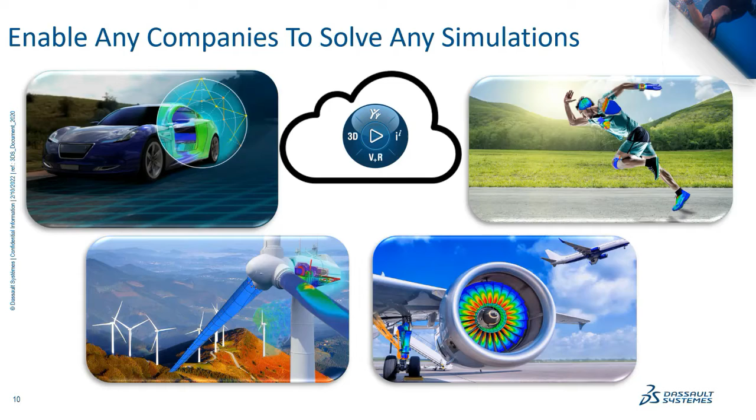Now market trends for simulation have never been stronger than before. It has been proven by the broad design, engineering and manufacturing industries that simulation helps launching new products to market faster. The benefits have been proven and are multiple: faster product development, less prototyping, more innovation, faster and informed decisions on design.

So before companies adopted simulation, there was a very lengthy process for any company to launch a new product into the market. They had to undergo various hand calculations to make sure the product is safe under the criteria, then create a prototype, do physical testing, and then launch the product. But due to simulation, the time to launch new products in any industry has been reduced.

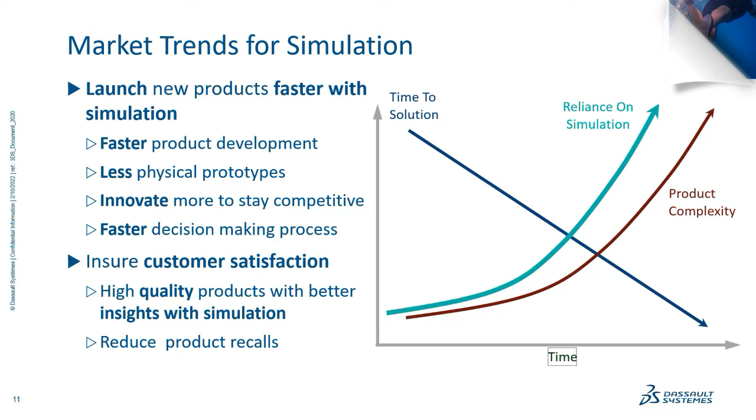Another key factor is customer satisfaction in providing not only innovative but high quality products. Market competition has become tremendous over the last 3 to 4 years, with everyone manufacturing more competitive products. So to survive in the market, we need to manufacture products that are more consumer friendly but also less costly.

The bottom line is that simulation helps you to be more competitive in your market. Now we all know SolidWorks simulation, right? It is able to perform analysis, and with the help of Simulia, we are able to perform more complex physics as compared to SolidWorks simulation. So what Dassault Systemes has done is create a cloud-based platform called SimuliaWorks for simulation.

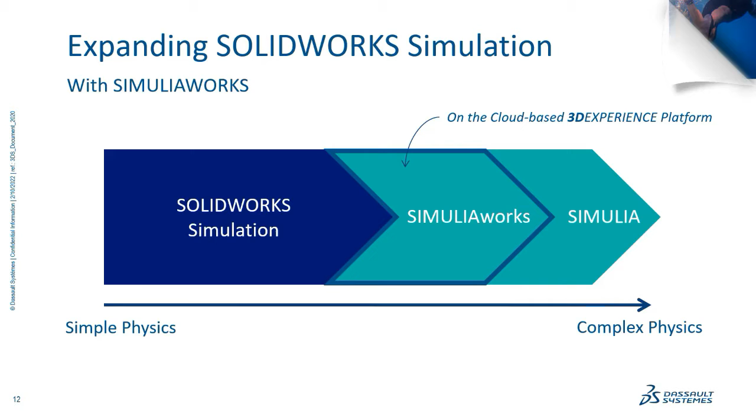So without wasting much more time, let us jump on to the Simulia, and look at why, when and how we should switch from SolidWorks simulation to SimuliaWorks.

Problems with very large deformation or strain - whenever you are considering a problem with large deformation, at that time we can jump to SimuliaWorks. Or whenever we have an assembly with advanced contact conditions, with a large number of contacts in an assembly, we are also able to get much more meshing capabilities in Simulia as compared to SolidWorks simulation.

Also, fast solve time for advanced analysis. Since this is a cloud-based FEA software, we are able to leverage the cloud capabilities to solve the problem - I will touch on that in the later part of the analysis. With a few more additional capabilities, you are able to use more computation power over the cloud to run your analysis.

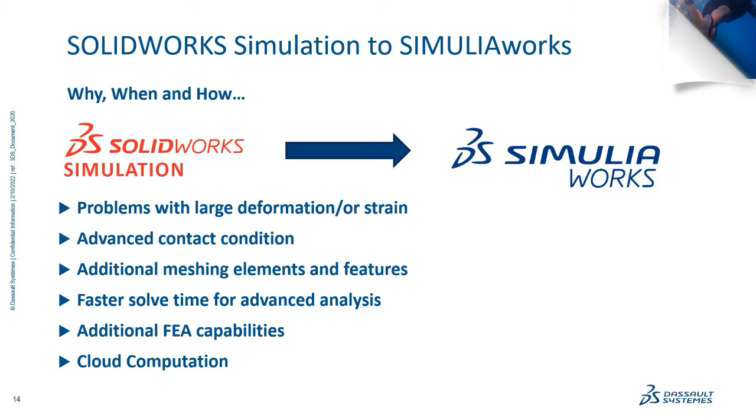So this is a simple model what I have created in SolidWorks, and this is a simple animation of it. So I need to be sure that the crank what has been designed is fit for its use.

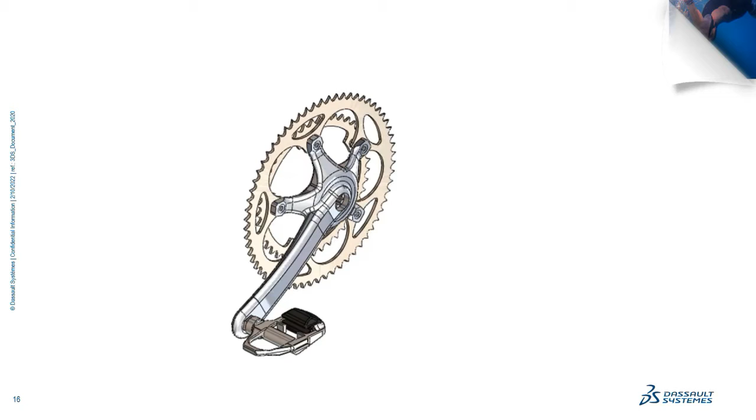So first things first, we usually simplify our model. We remove the unnecessary parts like the sprockets, etc.

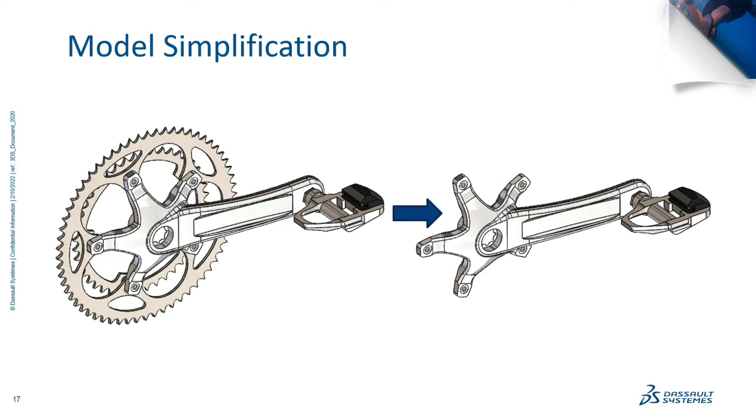And then we log in to the platform. Now the platform is always connected to the cloud, so each and every user will get his own user ID and password, his own credentials, so that he can log in to the platform and make use of various apps. Either he can be a designer, an analyst, or a marketing or sales guy. So according to his need, he can make use of various apps and start his work.

Let me jump on to the platform. I hope my platform screen is visible to you. So I have just logged in to my platform from my usual Chrome browser.

Over here you will get various roles, starting from your 3D creator, which is used for modeling. Then we have different roles for project planning, roles for electromagnetics engineer, roles for CFD fluid dynamics engineer, and so on. So today we will be considering the simulation roles, like my simulation mechanics engineer role. According to your role you can select it, and once selected, you will get the option to pick the proper app in which you want to perform the analysis.

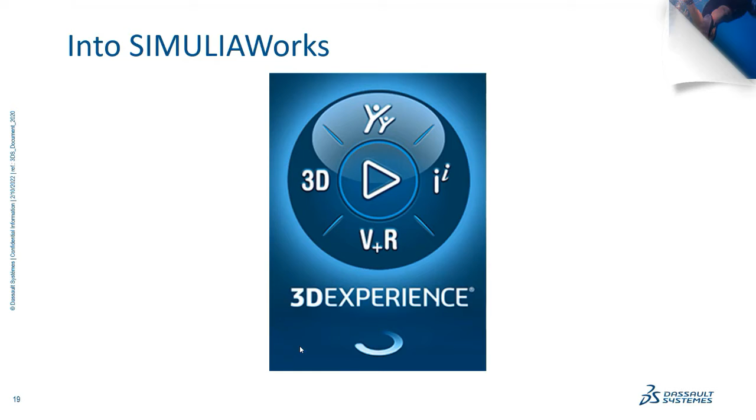And once you have opened your Simulia app, we are into SimuliaWorks. So let us check how we can set up the study and leverage the capabilities of analysis on the cloud.

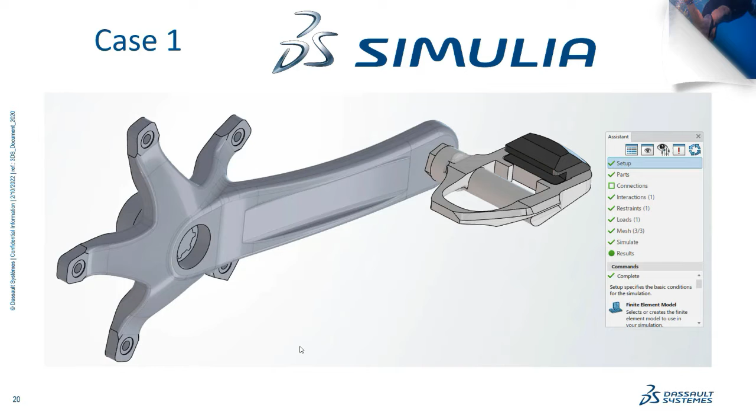Okay, so this is my Simulia window what you are viewing right now, and this is my crank. Over here you will get a good user-friendly assistant at the right side, wherein you can set up, apply material, apply any connections, fixtures, loads, meshing, etc. And on the left side you can see the feature manager, similar to what we have in SolidWorks, showing what kind of meshing is done, what kind of material is applied. So everything can be governed from here.

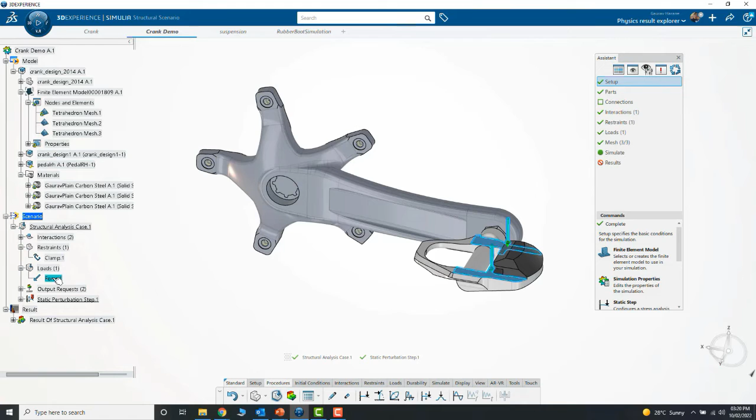And finally, what kind of boundary conditions like clamps are applied at these blue locations - I have applied a force at this location. So you can apply various types of boundary conditions. If you look at the bottom, there are various fixtures available, either clamp, displacement, bolts, etc.

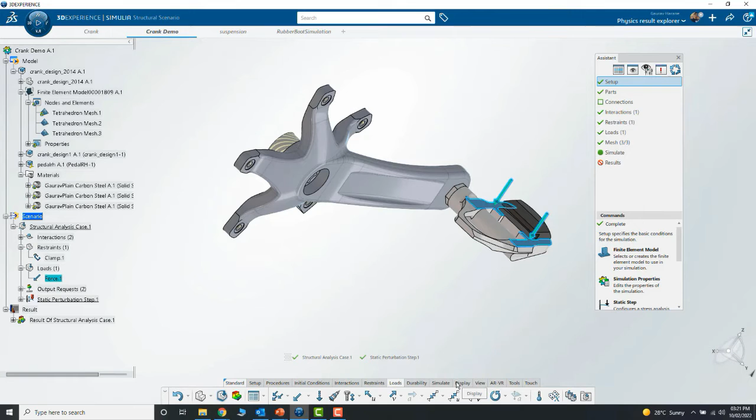And the same way it goes with loads, like if you want to apply pressure, force, gravity, relief, bolt force, translation, torque, velocity, and so on. And once everything is done, you just have to run the analysis.

Okay, let us touch upon the meshing part in this model. Let me jump on to Simulia and unhide the mesh. So you can see over here the meshing is performed. We have various advanced level meshing options available - not only can you use tet mesh, but we have hex mesh, hex dominant mesh, etc.

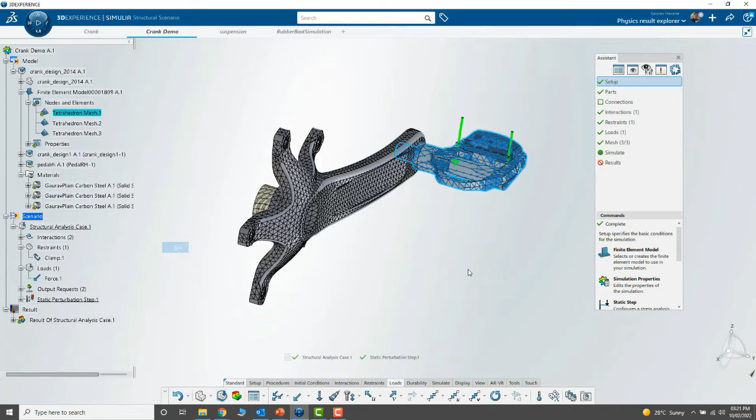So if I touch upon one of the mesh, let me edit it and show you the capabilities. From over here you can select the element order, etc. You can select the size.

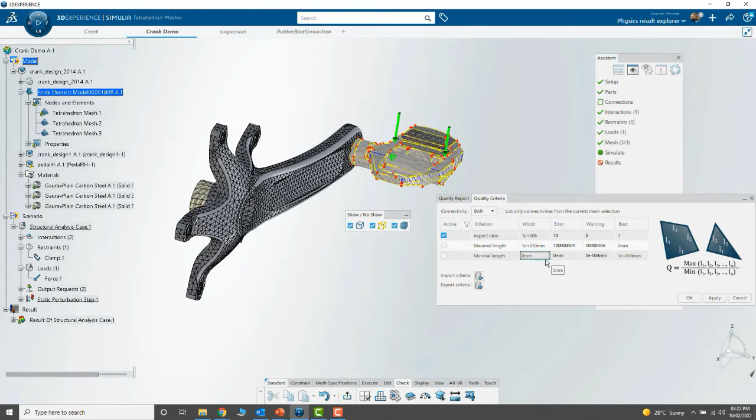In edit options, you can check whether your mesh is satisfying the criteria of aspect ratio, angle of element, and skewness. You can check what elements have failed or are not satisfying the criteria, and edit them to fulfill your criteria. You can even specify your own criteria for minimum and maximum aspect ratio, minimum and maximum skewness, or angle for each and every element.

So meshing is available in Simulia, up to a good extent. You can edit your elements, edit your nodes.

Moving ahead, once your materials, boundary conditions, and meshing are done, we go ahead and simulate it. In simulation we have different categories. If you want to check whether all the loads, boundary conditions and mesh are proper, you can simulate only the checking criteria, so that if there are any errors present, they can be taken care of earlier.

As I mentioned, you can perform the analysis on your local computer. As my laptop has 8 cores, it will show over here. Or else you can run your analysis over the cloud.

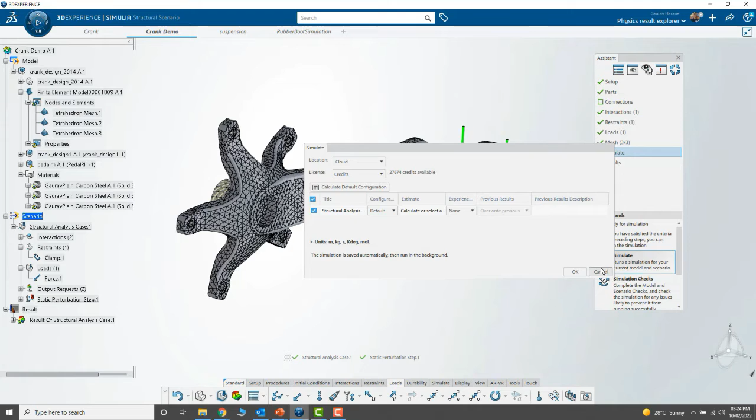Sometimes your problem is too large for your local computer to solve, and it may take 8 hours, 10 hours, days or weeks. At that time, you can leverage the advantages of cloud computing, running up to 144 cores, which can reduce your computation time from days to mere hours and minutes. This is one of the main advantages -- no need to invest much more money in your system resources, you can make use of cloud computation instead.

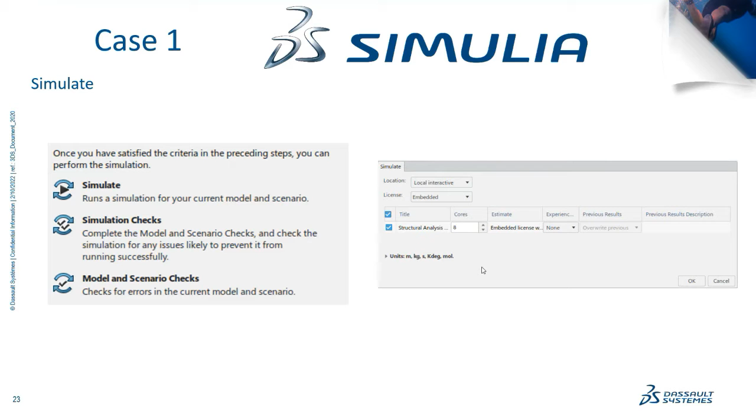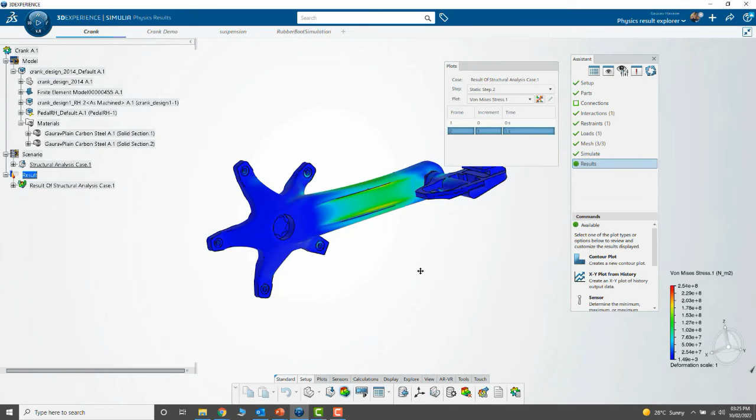So once analysis is done, we can check the results. Let me highlight the results. Over here I have run a non-linear analysis for 1 second, and these are all my post-processing options. This window will help you post-process your result.

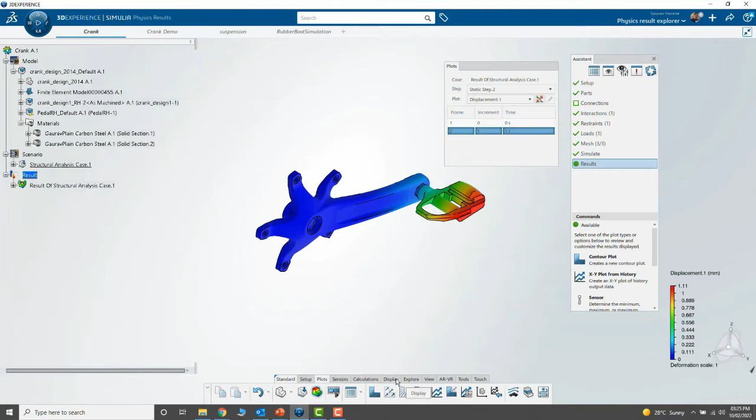This is my stress plot, and you can animate it to check the displacements. Over here it will show you all the values. You can even plot all types of results, starting from factor of safety, contact pressures, etc. You can also take a section of your plot to understand the results. So all these types of post-processing can be done from here.

And finally, you can create a good custom report as well once the analysis has been completed.

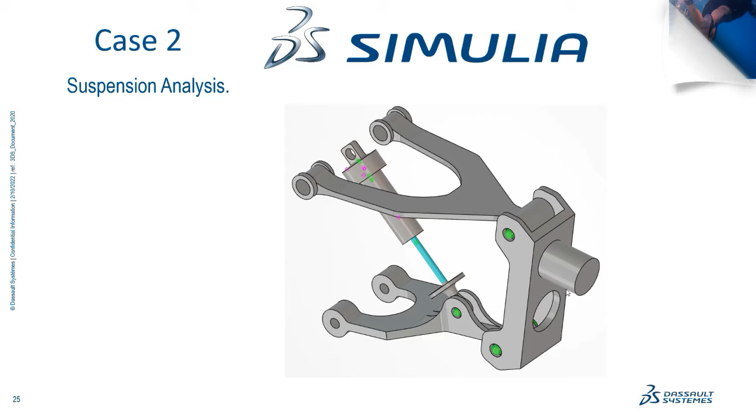Now moving ahead to the second case study. This is an example of a suspension. At this location where you see a circular extrude, my wheel will be mounted. I want to check, whenever the vehicle comes under a rough road or bumps, how these two arms behave, whether they would fail, and whether all the fasteners, nuts, bolts and pins are able to sustain the load or not.

So if your assembly is consisting of various parts, you are able to make use of contact conditions -- we have general contact in Simulia. Let me go on to Simulia and open the suspension assembly.

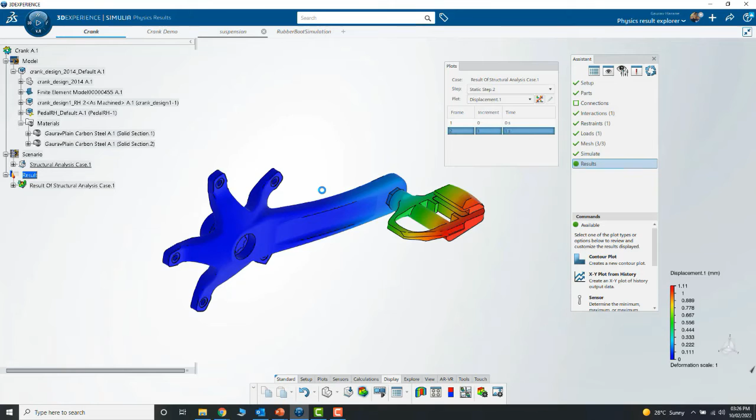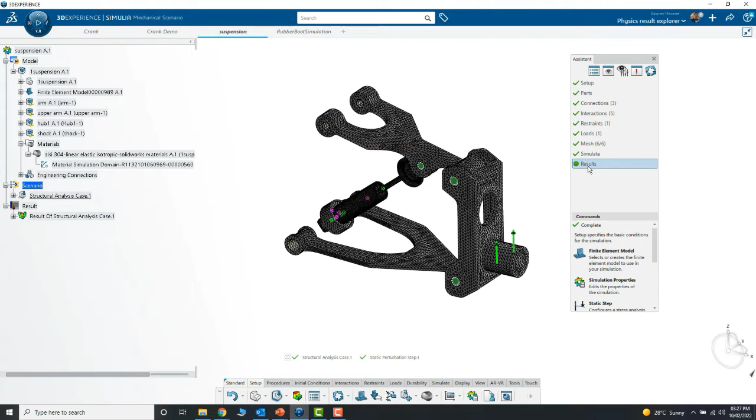And the material is applied. Finally, let me showcase the results. This is a simple static analysis I have done on this suspension. This is my stress plot -- the load from the wheel is transferred to the different parts connected to it. And this is my displacement values.

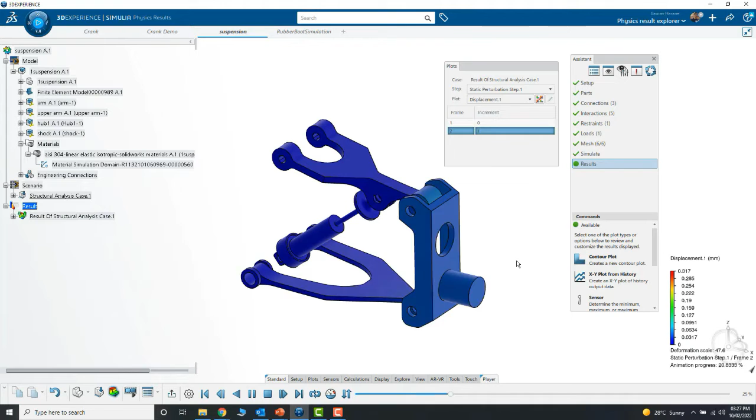Even you can apply pins, bolts and check whether those parts are failing or not. You can apply virtual pins, bolts, etc.

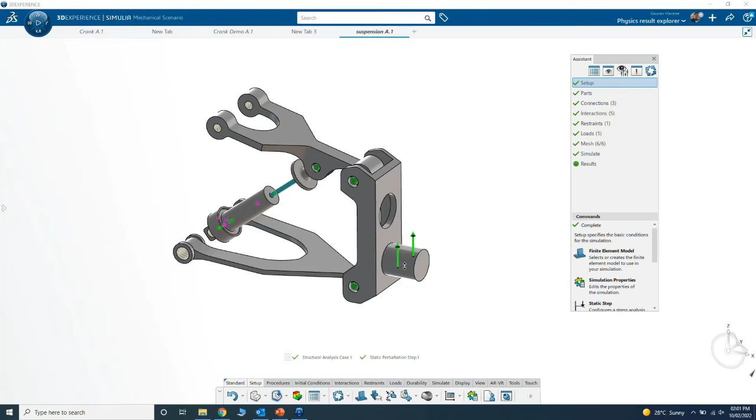Now coming to the next case study, wherein if you want to perform analysis on hyperelastic materials, like this rubber boot simulation. These rubber boots are used in many industries to protect flexible connections between two bodies. They are designed to accommodate the maximum possible swing angles at the joint and to compensate for changes in the shaft length.

Take an example of our gear changing mechanism in a vehicle -- whenever we shift gears from first, second, third or reverse, such rubber mounted boots are used. This is one of the applications.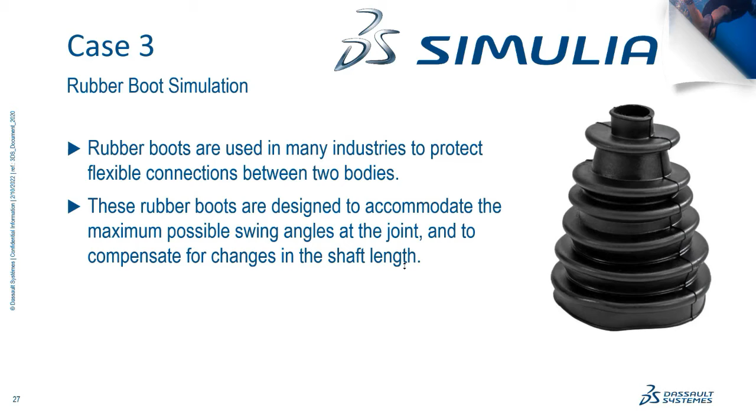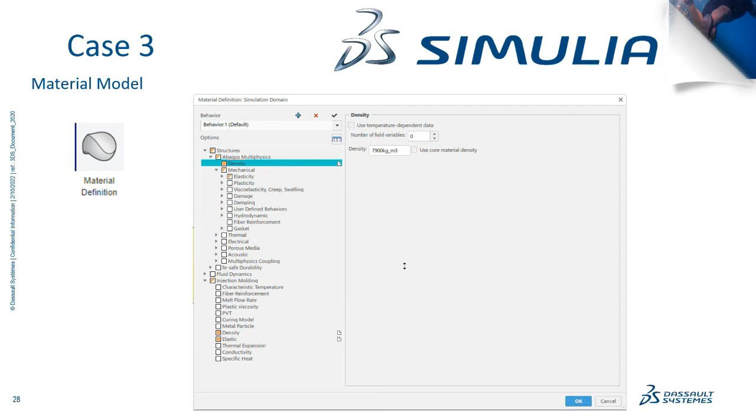In this we will look into material model creation -- what kind of material properties can be created in Simulia. Let's go into this. So from here we have this material definition app. For every application we have different apps. Like if you want to create a material, for example, let me give it a name.

So my material is created and you can provide all the parameters, like what is the density, even different properties in elasticity, whether it's a hyper elastic material, whether it is foam material, plastic material, if you're interested in checking the damage, fiber reinforcement, gasket material, thermal, electrical, etc. Material definition covers pretty much each and every aspect of the materials, so you can create your material by providing the suitable mechanical properties.

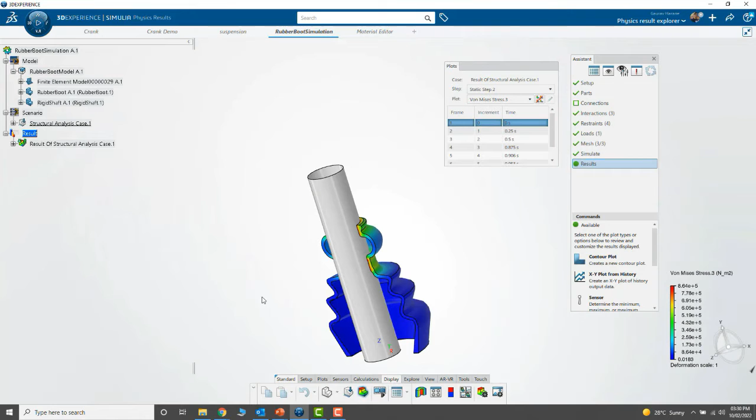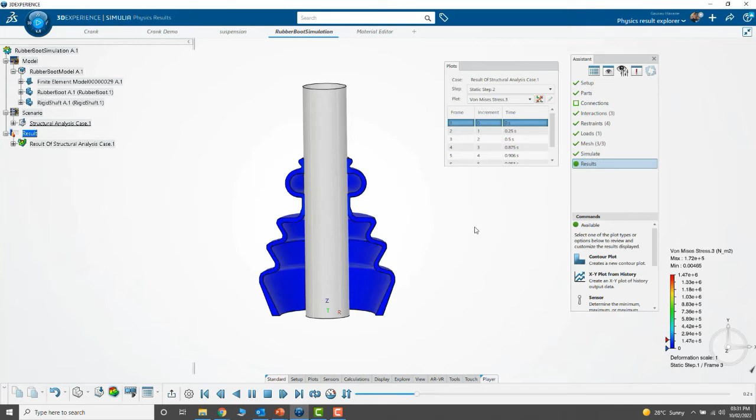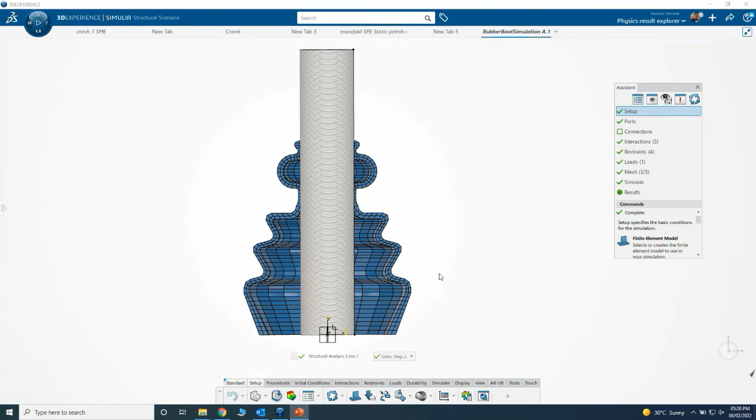Let me come back. I have taken the section and ran this nonlinear analysis. Whenever the angle shifts, the shaft is projected at any angle, for example, it is projected here at 30 degrees. So how does my material behave? You can see how the elasticity of the material performs. Such kind of analysis can also be done by providing good material properties. So this is my stress, this is my displacement values. Then you can even check the contact pressure values and so on. So these are the results.

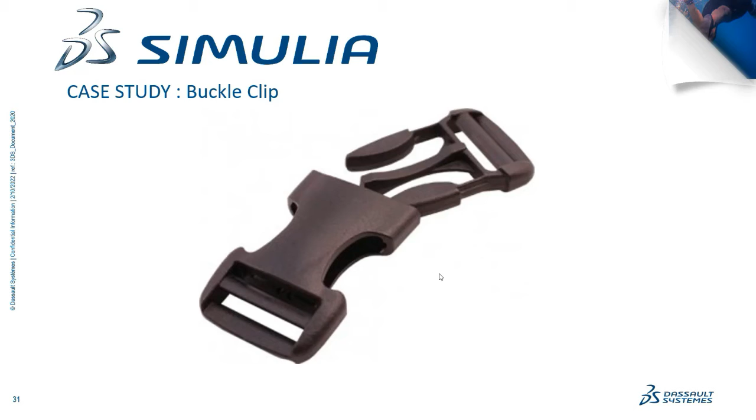Now let me highlight a few more applications. This is an application of a buckle clip where I had done the nonlinear analysis, which makes use of highly contact conditions. In this case you can see there is a contact between the two parts, so that can also be done in Simulia.

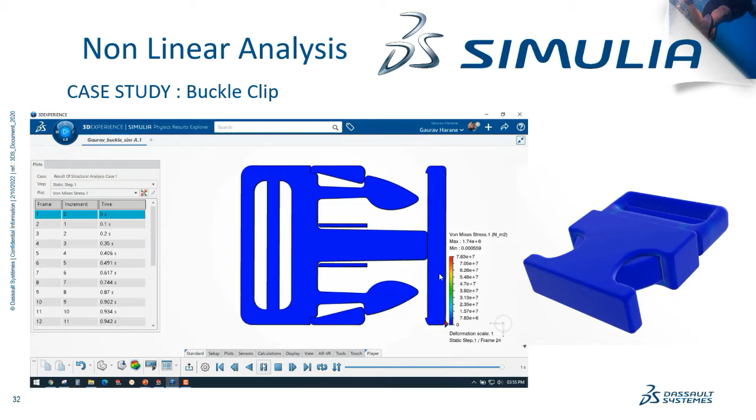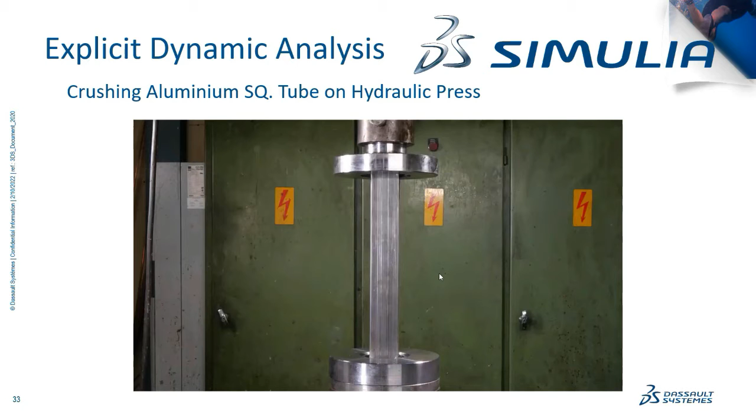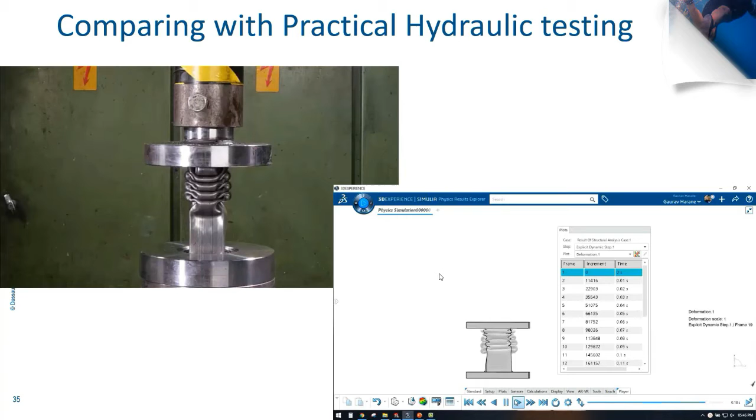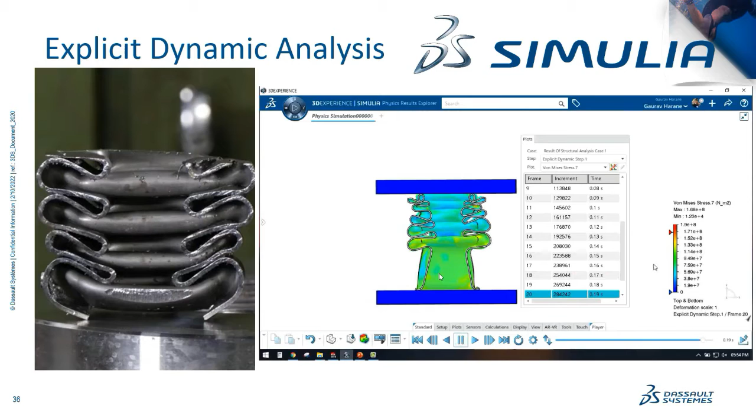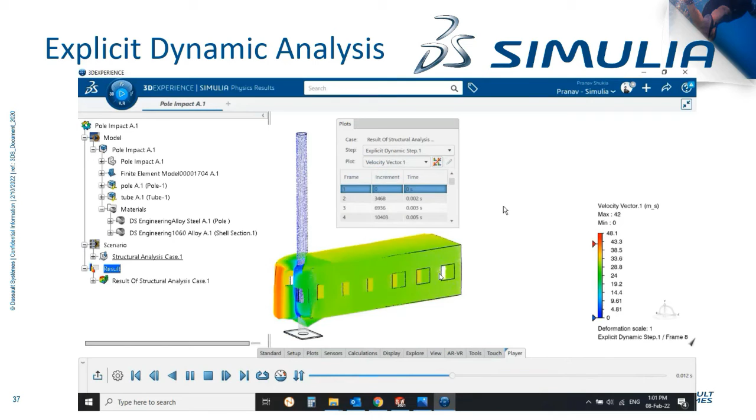Also you can perform crash analysis, impact analysis. Now this is an analysis of a bogie, or the train bogie, against the pole. Such kind of analysis can also be performed, and you can leverage the results like the stress, displacement, materials properties can be applied, and you can check the results. Nowadays we can see the crash analysis has been made mandatory whenever the vehicle is released into the market, so such kind of analysis are done for the same.

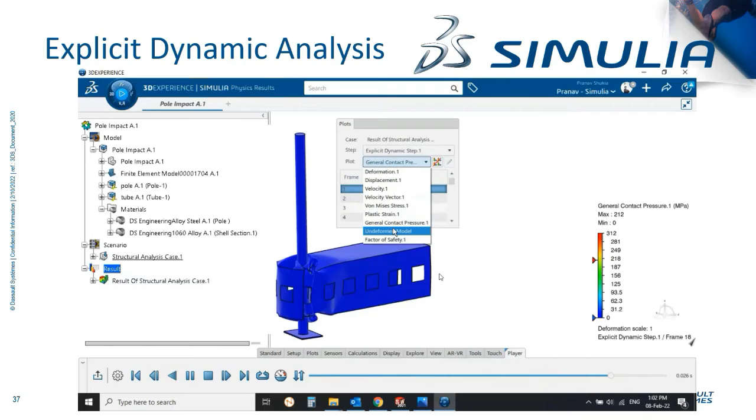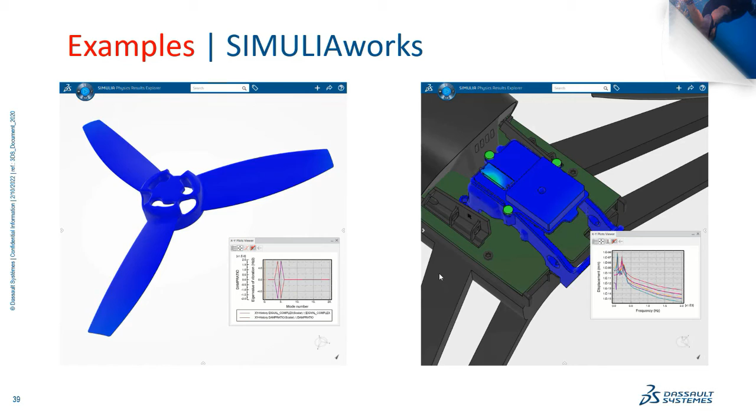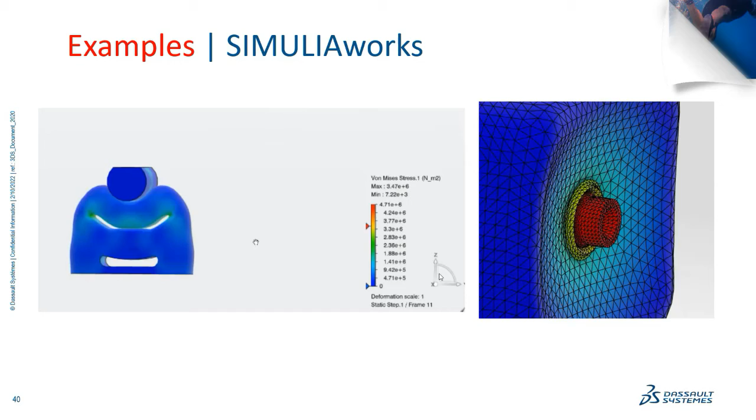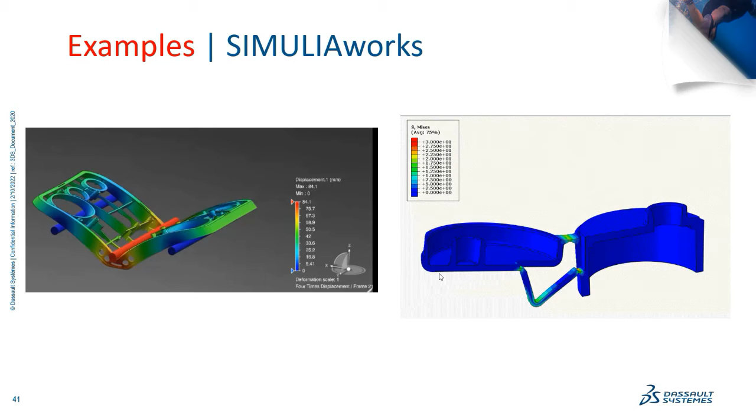And a few more examples like drop test, impact test, can also be performed in Simulia. Now this is an example of vibration analysis. You can even perform frequency analysis to extract the resonance frequencies. This is an example of hyperelastic materials, rubber materials. And this is an example of large displacement problems, like 3-point bending. For any consumer product, either it can be mobile or casing of any product as seen in this example, we perform this 3-point bending test to check the strength.

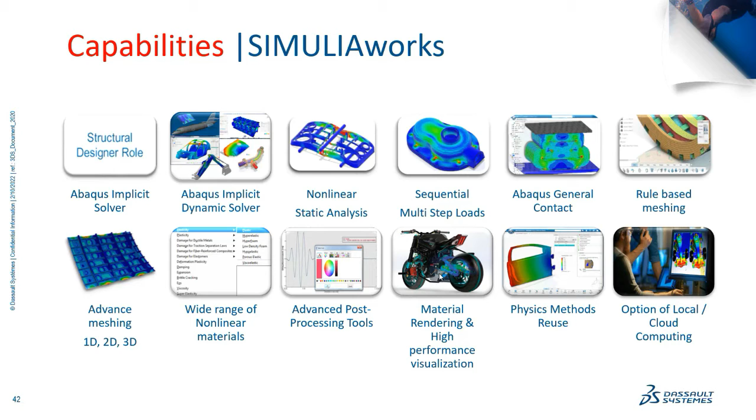Alright, now coming to the later half of my webinar, let us check what are the capabilities. So you are able to get Abaqus implicit solver in Simulia, you can perform dynamic analysis, non-linear analysis. You will also be able to perform advanced meshing, either it can be 1D, 2D, 3D, and you can provide a wide range of non-linear materials, either hyper-elastic, hyperfoam, hypoelastic, porous, etc. With the help of advanced post-processing tool, you are able to understand and visualize your results better. And one of the main advantages is the option of local computing or cloud computing - you can make use of cloud resources and go up to 144 cores to run your analysis.

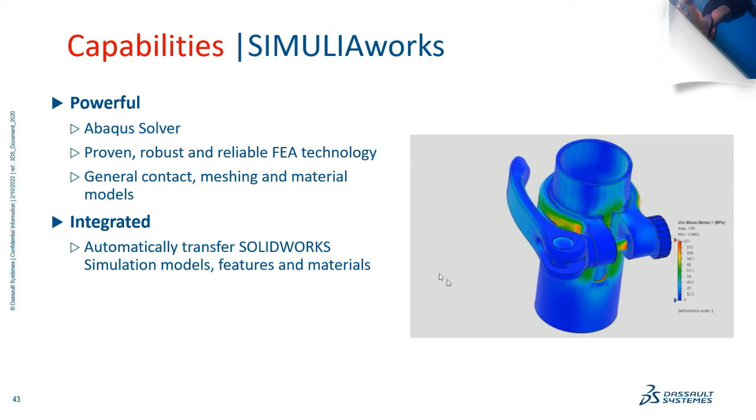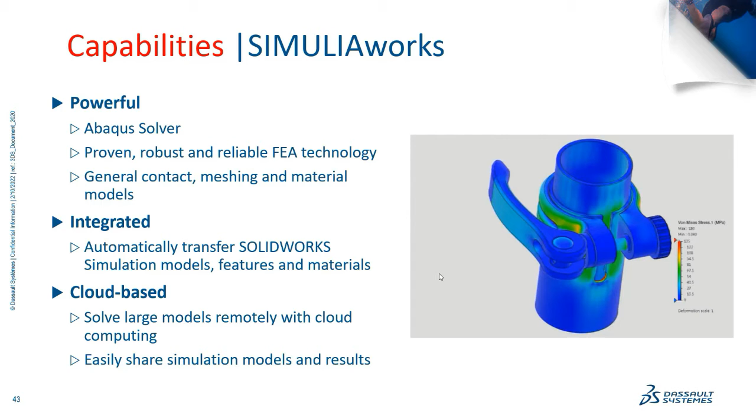Now if I talk about capabilities, it is very powerful, it uses Abaqus solver, which is a proven, robust and reliable FEA technology. And it is integrated with SolidWorks, so you can open your SolidWorks model directly into Simulia, and you can transfer your materials or your boundary conditions in Simulia. Finally, it is also cloud based - you can solve large models remotely with cloud computing and easily share simulation models and results within your community. So you can simulate any contact physics, any non-linear materials, either it is foam, rubber, leather, etc.

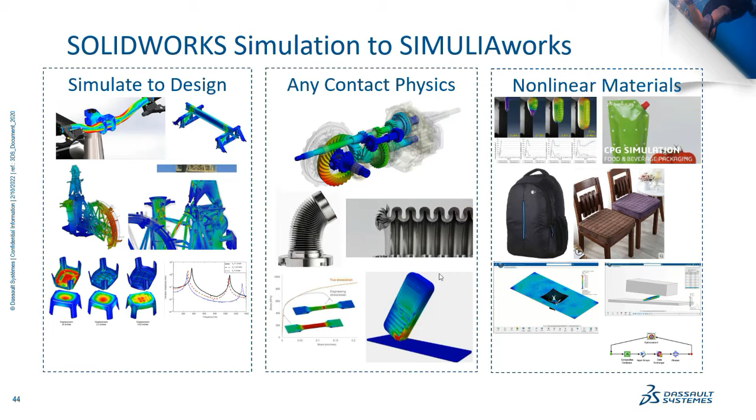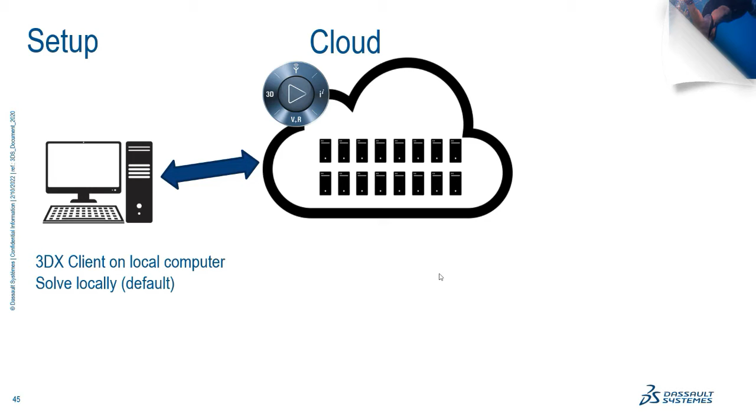Now let me just touch upon the setup. You install your client on your local computer, correct? Then you can connect to your cloud to run your analysis, which will save much more data. You are directly running it over to the cloud, so it will save your GBs of data. You will get more computing power, right? You can collaborate within the design team, sales, marketing teams, etc. And you can even stream the results.

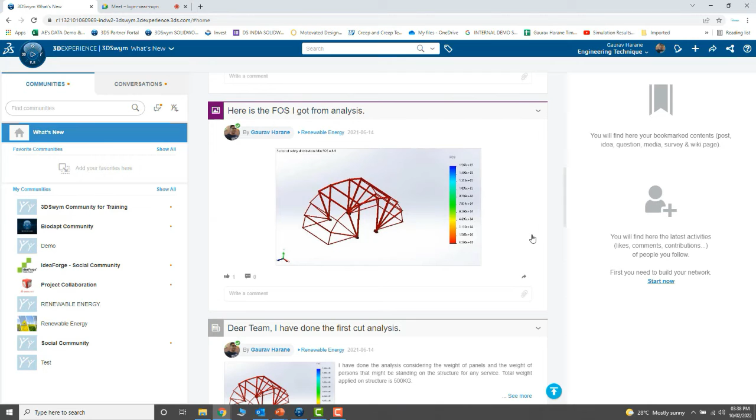Now let me just open my platform. So you can see over here, I have created this community also, wherein you can add your members into the community, and you can post your results, your findings, etc., which will help others understand how your project is going. Now this is an example of one of the projects I have done on renewable energy. You can even add videos.

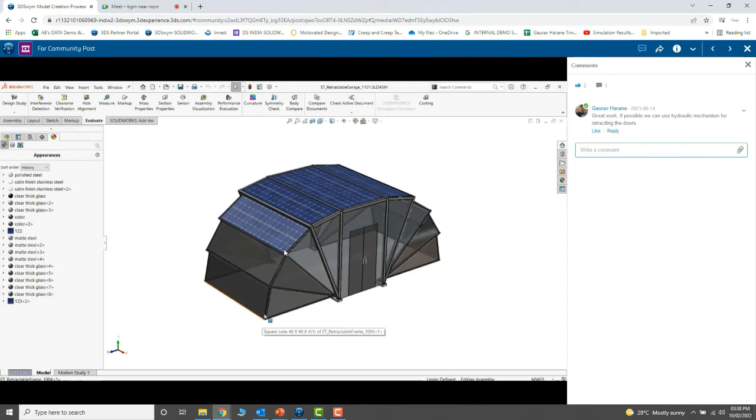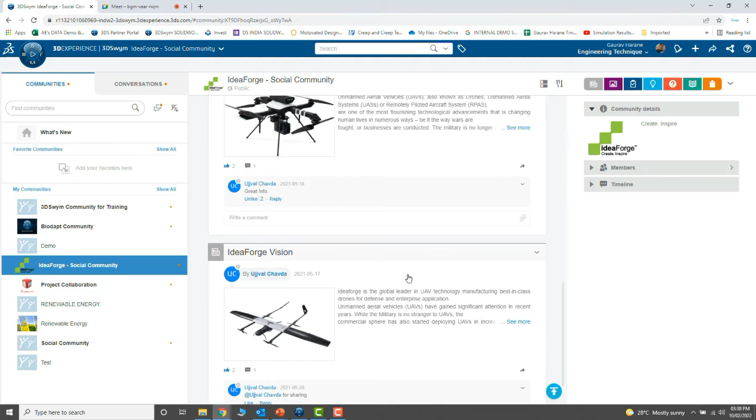So let me just play one of the videos. Yes, correct, so that all the members of this community are able to understand what the product is. This was a product of solar retractable car parking, correct? Likewise you can even comment, give likes, etc. You can create various communities in which you are working, get ideas, post ideas, and even post results. Like this is the simulation result I have posted over here.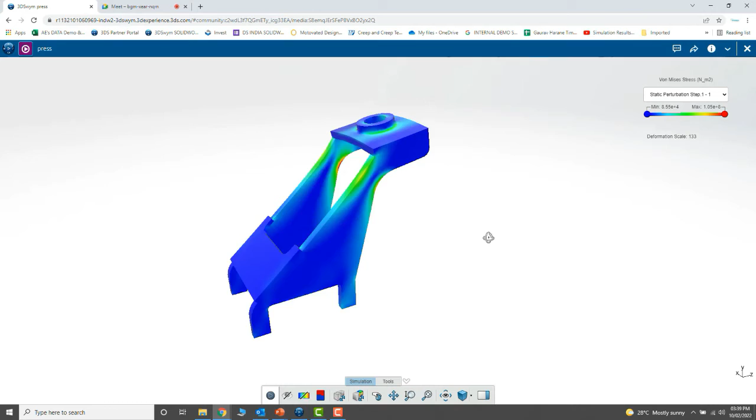So there is no need for the user to install the simulation. He can check the results directly onto the cloud, right? What is the stress? What is the displacement? He can even measure or take a section and understand the results more clearly. And then you can go ahead.

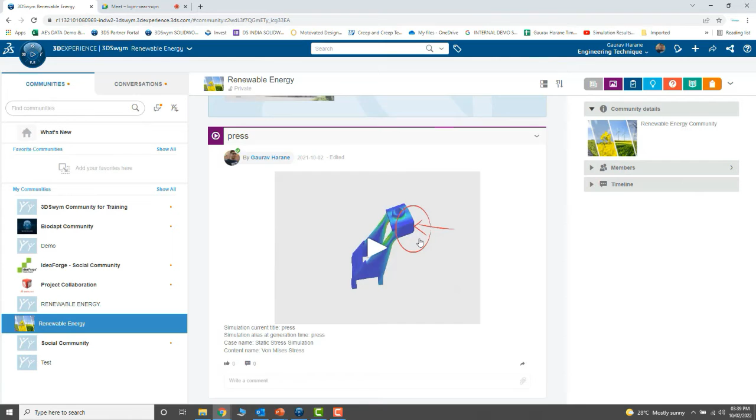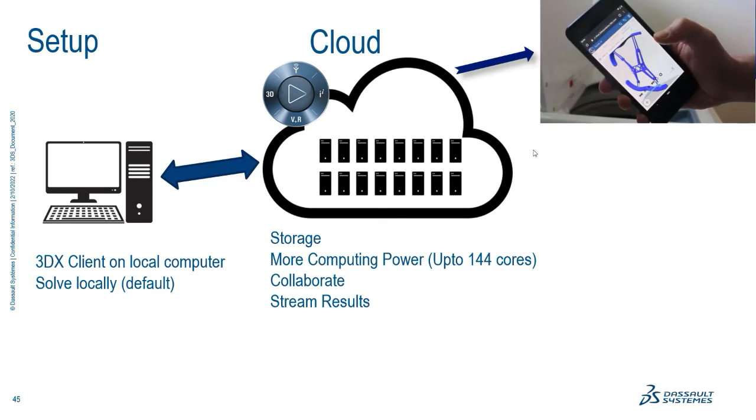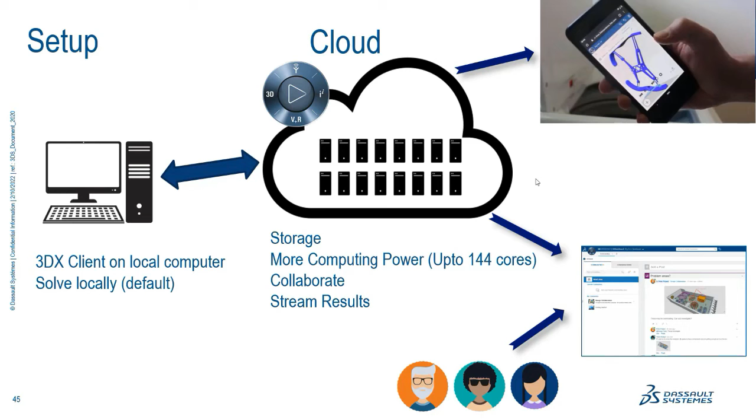You can even make use of your simple iOS or Android devices, mobile or tablets, to go through the community and understand the posts. Even it can be opened on a simple mobile phone, or it can be opened on your laptop, desktop, etc., where you can collaborate and share the results, ideas, etc.

And a few of the existing customers, like we have Tata, Hydac, in energy and material, Seco Technologies, in medical and life sciences, as well as in high-tech equipment we have Silixia. So these are a few of the customers who are using SimuliaWorks.

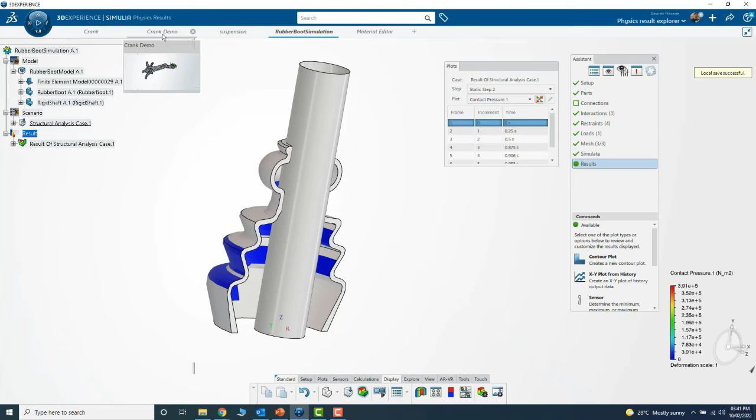As you have seen, tremendous meshing capabilities are available in Simulia. So you can do the meshing and run it here itself. I don't think there is a need to import the meshing into any other software and run the analysis. So if you are able to mesh in this software, why not run it also? It's just a click away, and it is very simple.

You might have checked it. We have this good assistant at the right side, which will give you information on whether loads, meshing, restraints are given. It will give you a green tick, and at the left side you can see what restraints I have applied, and at what locations. So I don't think it is very difficult - it is as easy as SolidWorks CAD software. Everything is bifurcated very clearly here, and at the left side you can see I have expanded the screen.

Yes, CFD is possible. So let me just go to my platform, and over here you will just have to open your fluid dynamics engineer role. The person assigned for this role will get the app to perform CFD analysis, fluid scenario creation. We even have the app for plastic injection mold engineers - if you assign this role to the engineer, he is able to perform plastic injection also. So these are all the roles. If you are only interested to perform 2D drafting, that role is assigned to you and you can just perform drafting. So according to the role you perform in your industry, we have bifurcated this.

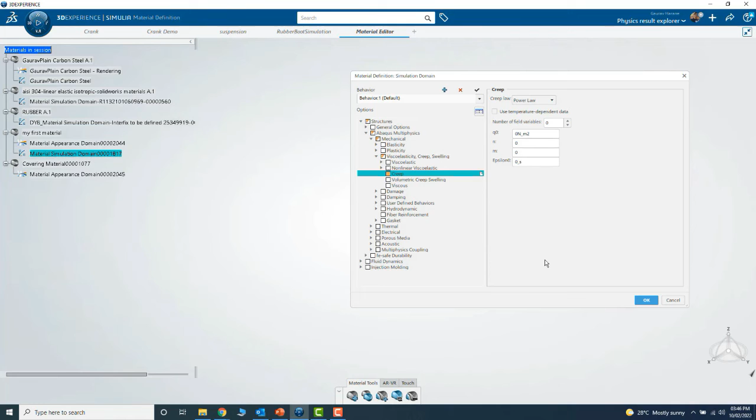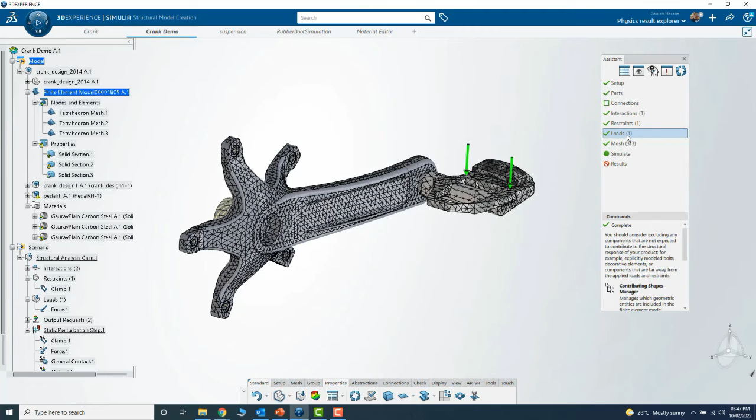Okay, for boundary conditions, right. So first thing, we set up the model, then we apply the section properties. Now what does section property do? You can divide whether it is a solid part, a shell section, or a beam section. So you will have to provide the section properties, then you will have to provide connections if any. And with respect to loads, once you click on load, you will get all these types of loads.

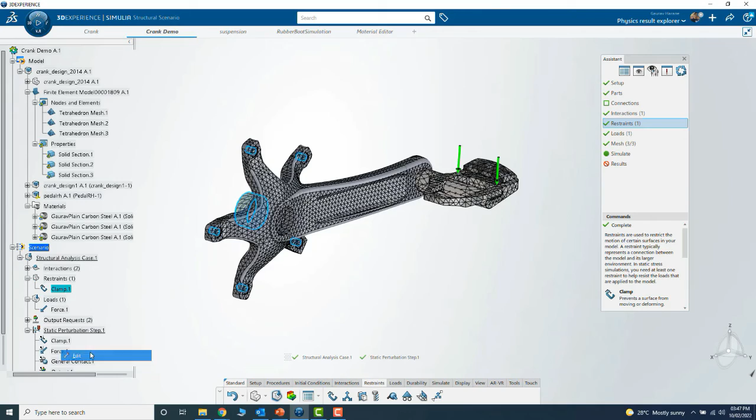Let me show you one, like I have applied the force at this pedal and you can define the values. The same for restraints, you will get various types of restraints available at the bottom. The restraint I have applied here, let me edit it. This blue highlighted region, I have applied fixed restraints. So once you create the setup, if it is okay, it will give you a green tick and you can go ahead and simulate.

Can you just elaborate your question once more? Iteration means what are you trying to specify? Okay. No, CFD part is different, right? Yes, in that we can provide iterations, you are correct. But in Simulia, we do not depend on iterations. You can run your analysis and check the results, that's it.

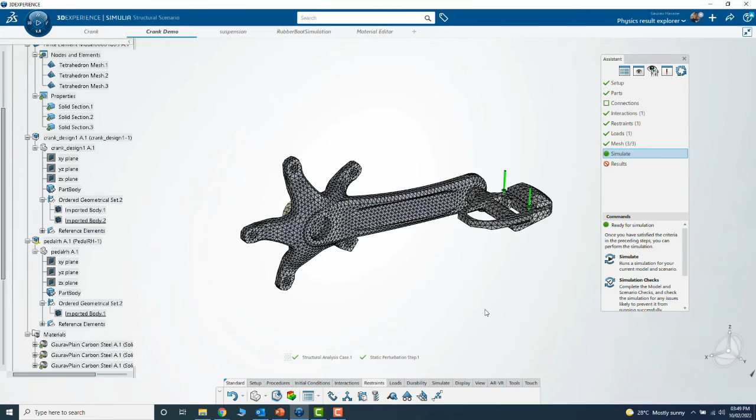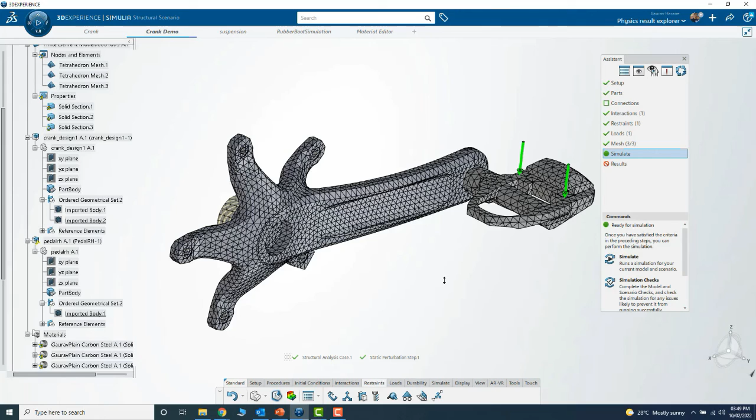Time means, it will take time according to the material, according to your assembly or the model. What kind of contacts, what kind of load, fixture, depends on the size of your model, it will take the time. And to reduce your analysis time, we have the cloud computation option, as you have seen. You can run it over to the cloud.

Yes, net is required. Like I have opened this platform with my credentials on my Chrome browser. So the net is required, and for using any application for analysis or anything, you will require internet. This is not installed software, it is working on cloud. Yeah, net is required.

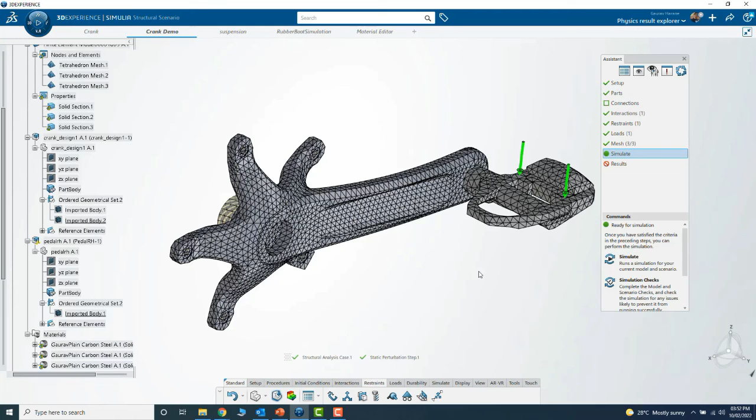Yeah, not only that, we are also having the option of CAD modeling in Simulia. So the entire SolidWorks is moved onto the cloud. If you take a look at this role, Collaborative Designer for SolidWorks, from the cloud itself you can log in or open your SolidWorks and perform your analysis, designing or modeling. So if you are interested in setting up such a futuristic tool in your university, kindly come in contact with us. We can have a discussion on this as well.

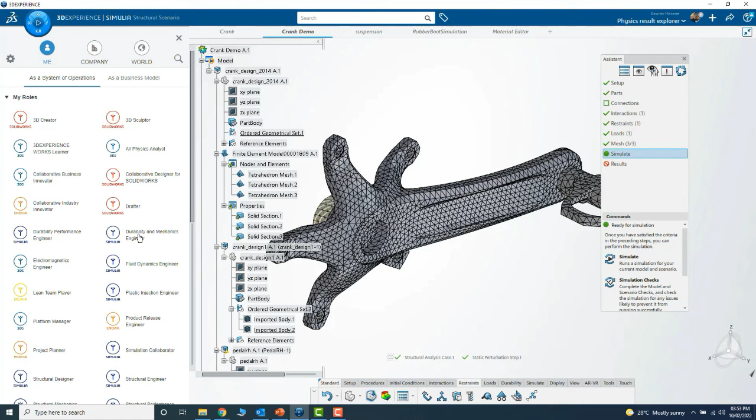Yes, even programming, NC programming, or CNC machining - roles are available for that also, not only modeling and analysis. For the complete package, I will have to check with my sales engineer, who will give you a good idea regarding the costing and pricing. So for any more queries, you can contact us so that we can have a one-to-one discussion regarding this.

Yeah, actually I am also not aware as a technical person, so my sales person will give you a good idea about this. Yeah, yeah, thank you.